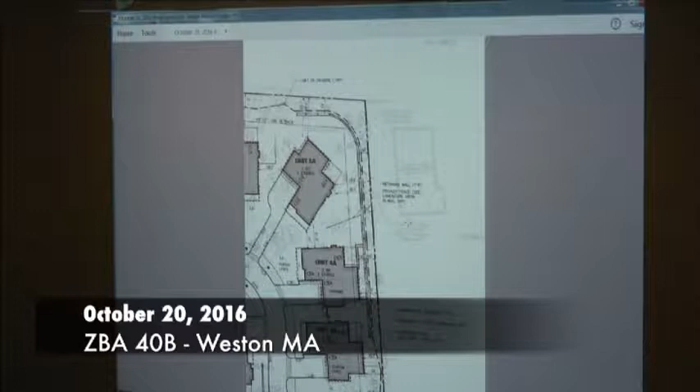So in conjunction with that, we also took a look at how that would impact the aesthetics and the use of this building. What we've also done is introduce a small seat wall along the edge of the patio, which allows for a stepped effect. So at that point, you're not looking at as much of a uniform wall. You're allowed to landscape it and essentially improve the visual appeal from the building side as well. So there's no real negative impact on the building.

What's the distance from the edge of the house on 4A to the wall? It's 10 feet to the back of the wall, which would translate to roughly 8 feet to the face of the wall. No, I mean between the house and the wall. Correct, so it's about 8 feet.

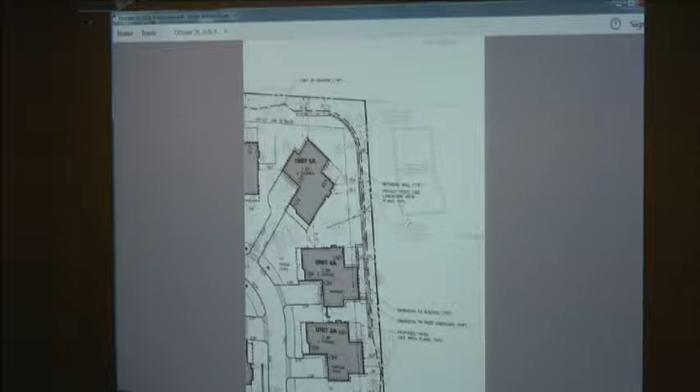We have another slide here. So we developed this section to clarify the situation, to provide a little bit of detail. Now what we've done is made it so that this limit of work line is no closer than 8 feet from the property line. And you have about 8 feet from the building to the face of the wall, which will be landscaped with bushes and shrubs, small landscaping that allows the screening of that wall from the development side.

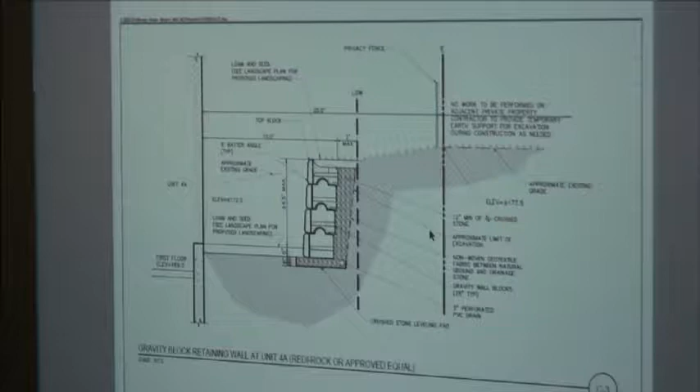And the wall is how high? The wall varies. At that point, it's between about 2 feet roughly here to about 4.5 feet roughly here. And then as you step down, at the highest point it's 6 feet, then decreases again as you come back around. Wait, is the highest point 6 or 4? 6 feet. Where does it start? It's 0 right here at the end, about 2 feet here. And then it raises in grade because the existing grade along the property line slopes up, so it essentially matches the grade, increasing to a 4.5 foot height here because you have a 2 foot smaller wall here.

As you step down from that wall, the effective height is 6 feet from the low side. And then from that point, it decreases in height as you go further to the east and around the corner, where it eventually becomes zero. Can you step it up for us? Yeah, so at this point it's 6 feet. At this point, you're about 4.5 feet. At this point, again, 4.5 feet, and then it decreases from here to 2 feet, and then it's flush at the end.

With those changes, there's a great improvement to the treatment and the undisturbed area along the property line. It's a benefit to the trees, and it also doesn't negatively impact the units. The setback of all the buildings from the property line now is no closer than 20 feet, so it's just 2 of those buildings now that are within the setback for the property line. I'll turn it over to Gigi to talk a little bit about the landscaping that's been revised.

Would it be 3A and 4A that are now 20 feet? 3A was always in excess of 20 feet from the property line, just over. 4A now is exactly 20 feet from the property line. So 3A has not moved. Correct, 3A was always 20 feet, just a shade over. 4A will now be set at 20 feet from the property line.

Can you all hear? No. You have to try to project. Would you like me to do it again louder? Maureen, is there any amplification at all in the town, a portable mic anywhere that we could get? Not that I know of, I asked and they didn't have them hooked up for this room. All right, you're gonna have to stand in the middle, or yell.

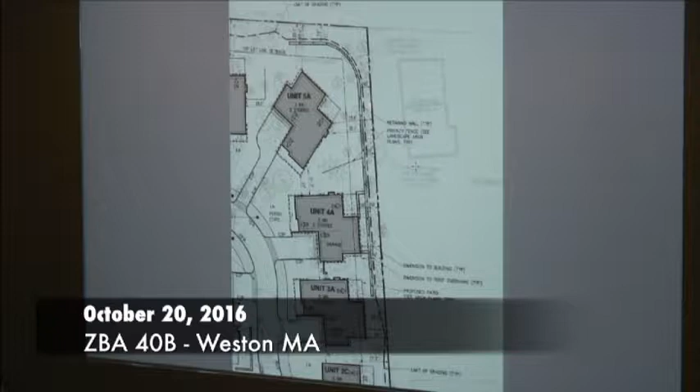To recap, what we've done is shifted unit 4A so that it's 20 feet from the property line. That was an increase of about 2.5 feet from where it was previously located. We've also removed the jog in the fence where it used to run along the property line, to the point where now it's uniformly 10 feet from the property line along this entire edge.

The height of the wall has decreased a little bit relative to what it was before, because the natural grade slopes into the site, so the top of the wall doesn't have to go as high. The wall increases at this point from essentially 0 feet at the edge to about 2 feet here, 4.5 feet give or take along this edge, 6 feet right at this point, back down to 4.5 feet, continues at 4.5 feet, and then transitions back down to being flush at this point.

With that, we've also introduced a small seat wall along the back of the unit here, which will allow landscaping to be planted in this small raised planter area, which will be about 2 feet high. This will allow the visual effect of the wall from the development side to be more appealing because it will be screened by the landscaping in that area.

At this point, the limit of work or the limit of grading in order to construct the wall and all the site improvements will be no closer than 8 feet from the property line along this southerly edge. With those improvements, we believe that's a great impact in a positive way to the development. It's going to help the longevity of the trees, and it's also going to help the project from a buffer standpoint as well. Happy to answer any questions if anybody has any.

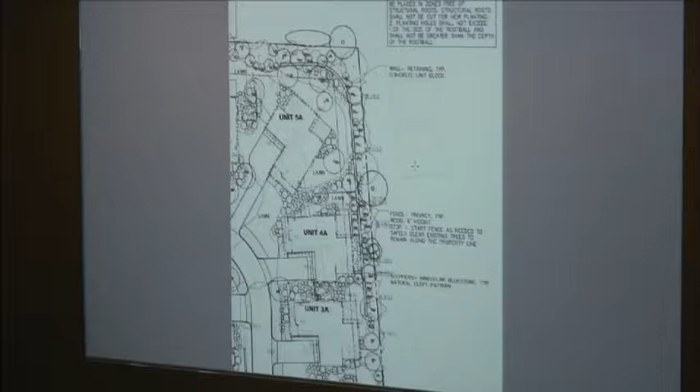We've noted that there is one, potentially two locations where we will stop the fence and restart it because of trees that are actually on the property line. We don't want to interfere with those.

Carlos and Gigi both mentioned that the expanded area with the 8-foot setback provides significantly more soil volume for the existing roots. Prior to construction of the wall, the trenches would be air-spaded with a supersonic air jet stream to do exploratory work to locate the structural roots.

The roots will be slightly cut back from that 8-foot distance to give them enough room to regenerate. So that increased soil volume allows more room for the existing roots to retain, and more space for the roots to regenerate.

Is that it? Any questions? Yes, I do. Have you identified the number of trees that will be impacted by having to cut back roots?

And that entire woodland is protected by a proposed tree protection fence that will go all along the perimeter. It will come around here and down this property line. So those trees will be preserved. They range in sizes from 4 to 22 inches in diameter.

I'm not clear, are you putting in plantings on the abutter side of the wall? Not on the abutter side of the property line, but yes, on the upper side of the wall, between the wall and the property line. But not across the property line on the abutter's property, right? This is all within the project area. Okay, so these are all new plantings, the circles that you have?

Some of those circles are representative of existing trees. The ones that have letters on them identifying what type of tree it is, those are all new trees or shrubs. Obviously, the smaller couple sizes of circles are shrubs.

And again, in that upper area there, at the higher elevation above the wall, I think we only have 4 trees proposed for there now. The rest are all shrubs. And how high will the shrubs grow?

Those max out at, things like the Ilex meserveae max out at 12 to 15 feet. Things like rhododendrons are highly variable. I mean, they can be 30 feet, but that's over a long period of time. The ones shown with the larger shrub symbol go in at 4 to 5 foot height, and the smaller circles go in at probably about 36 inches.

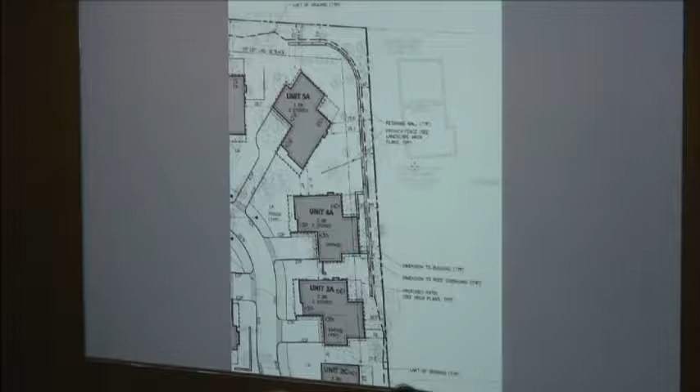No, the question is, if you just take for example 4A, since that's one of the ones you just worked on. Could you put the schematic up of the units while he's talking? Put up the layout and materials plan. So we just have a portion of it, but sheet C3. There's... you don't have one of all the units? Yeah, you do, you have to post the full-size one with the trees. Oh yeah, that's the one with the unit numbers on it. Great. That doesn't have the unit numbers on it, which is more or less what they had before. He can point to it if you could. Do you have the sheets that you submitted to us this week? We could reference that. Point to the screen, somebody can point while he's talking. Well, anyway, 4A is on the other one anyway.

I guess if you push 4A in so that it's 25 feet off that property line, why isn't that an improvement with respect to the 25-foot setback? And do you have an argument about why it would render the project uneconomic to push that back to 25 feet? I can speak to why it would be a detriment to the project.

If we start moving this building further away from the property line, all of a sudden this building is going to be obscured by this one creeping in, so you lose sight lines and the good feel that you get from that unit. That would make it more unappealing. If we start pulling these in, you're losing front yards for these units, and you end up being close to the road, so that would be a detriment.

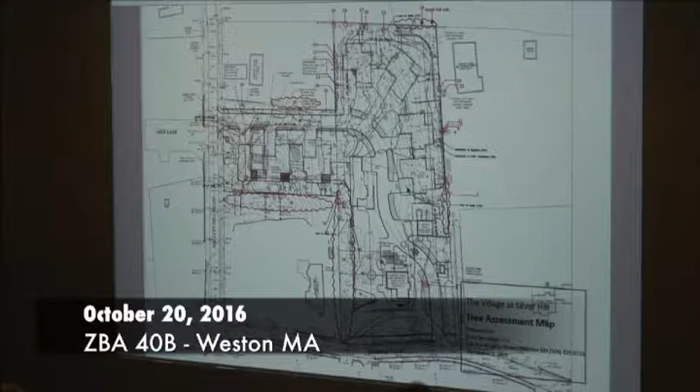What about the utilities, and the 4-foot front yard? So as we start squeezing things into the center of the site, the utilities are all located in these central locations in between the units. If we start squeezing the buildings closer together, they end up getting closer to the utilities as well. There are certain setbacks we have to keep, required by state bylaw. So if we squeeze even more than what we have shown here, the properties lose a significant amount of value, and you'd probably have to lose a unit to make it work. Well, at what point do you have to lose a unit?

I think we're at the point now where you have the plan. I'm not telling you your job, but you've got to vote on what's in front of you. You're not going to redesign it, because we're not redesigning it anymore. This is the best we can do with what you have now, with what we've figured out to make it work for us and work in the best way possible, and that's the plan. So it either gets voted up or down.

But don't you either have to comply with the setback requirement or demonstrate that compliance with the setback requirement would render the project uneconomic? There are two issues with that. If you don't give us the setback, the plan that we've given you doesn't work, then it becomes uneconomic. If you lose a unit, it becomes uneconomic.